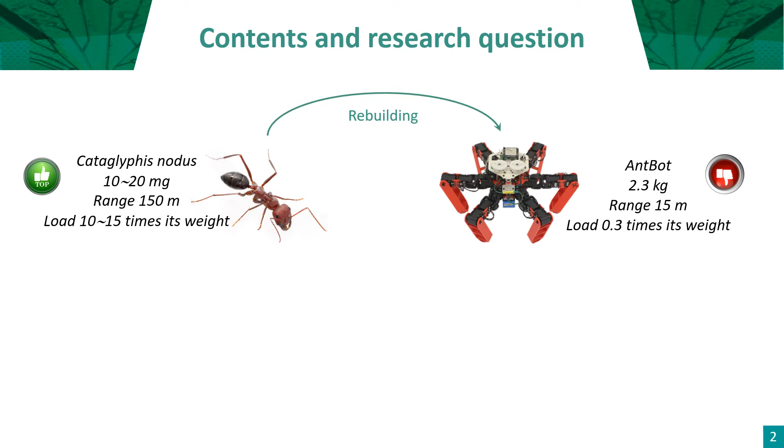The MiMiC-ANT project was helpful to better understand the gap between ants and hexapod robots, to bridge the knowledge between ants and robots. The CRCA has expertise in both ant morphology and locomotion, and the ISM has expertise in both artificial sensing and robot design.

So our research question is here: how can we take inspiration from ants to improve load transport in hexapod robotics?

Let's start with why ants are a good model for the development of innovative locomotor pattern strategies in hexapod robots. First of all, because of their great biological diversity, there are currently more than 13,000 species of ants in the world. These ants live in very diverse environments, from the canopy to the ground. They move on very varied substrates, which can sometimes present strong roughness and constitute very uneven terrain.

Because of the diversity of the populated environments, ants also often present specific morphological and behavioral adaptations, which are often remarkable. You see two examples here.

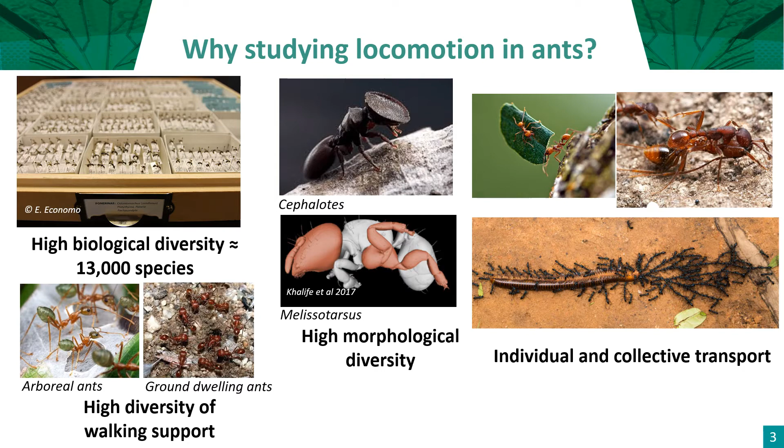Finally, ants have the particularity, quite unique in the animal world, to carry loads either individually or collectively. In some species, the loads carried can weigh up to 15 times the weight of the individual. We can therefore draw interesting lessons for the development of load-carrying hexapod robots from the way these insects adapt their locomotion pattern according to the weight of the load they carry.

Now let's move on to a small recap on the locomotor system of insects, and ants in particular. Like all insects, ants have 3 pairs of legs.

Each leg has a different length and is formed of 5 segments: the coxa, the trochanter, the femur, the tibia, and the tarsus. At the end of each tarsus are usually claws that allow the ant to cling to the substrate. The joints between the different segments are of different types, as can be seen in this illustration.

The sensory feedback on the position of the legs during locomotion is based on the stimuli provided by mechanoreceptors that are distributed at different locations on the legs. The campaniform sensilla are, for example, a type of mechanoreceptor located at the coxa and trochanter and are sensitive to stress on the cuticle.

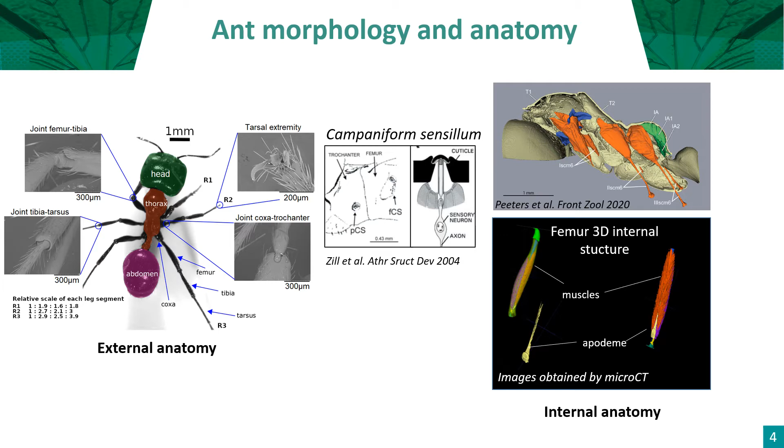The legs are actuated by muscles that are anchored on apodems of the exoskeleton and that can sometimes cross several segments, as here in red, the muscles of the trochanter that cross the coxa and that are anchored on the upper part of the thorax.

To study locomotion in ants, we used the following device. Ants move on a horizontal platform. They are filmed by 5 high-resolution cameras at 250 frames per second. The platform is illuminated by 4 infrared spots which are synchronized with the cameras, which allow a better contrast between the ants and the background on which they move. The videos are then analyzed by Kinovea software, which allows semi-automatic tracking of several points of interest on the body of the ant, in particular the ends of the legs.

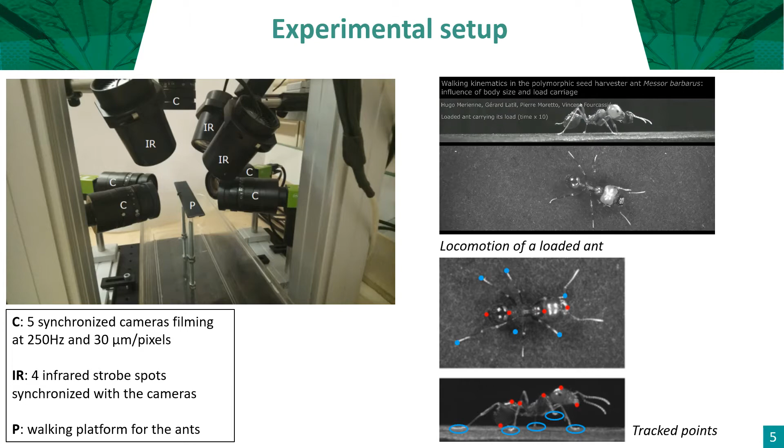The results show that ants are able to adapt their locomotor behavior to the load they carry in order to increase their stability. This stability is indeed put at risk by the load they carry, which shifts their center of mass towards the front.

The 2 graphs you have here are podograms. They show the sequence of support and lifting of the ant's legs as a function of time, for an unloaded ant on the top graph and for the same loaded ant on the bottom graph. The color coding on the bottom of each podogram indicates the number of legs simultaneously in support. The top graph shows that the locomotor pattern observed for an unloaded ant is fairly consistent with the locomotor pattern encountered in all insects. The locomotion is said to be in alternate tripod.

The 2 tripods are formed respectively, for the first one, by the right front and back leg and the middle left leg, and for the second one, by the left front and back leg and the middle right leg. We can see on the podogram of the unloaded ant that the gait is more or less in accordance with this diagram.

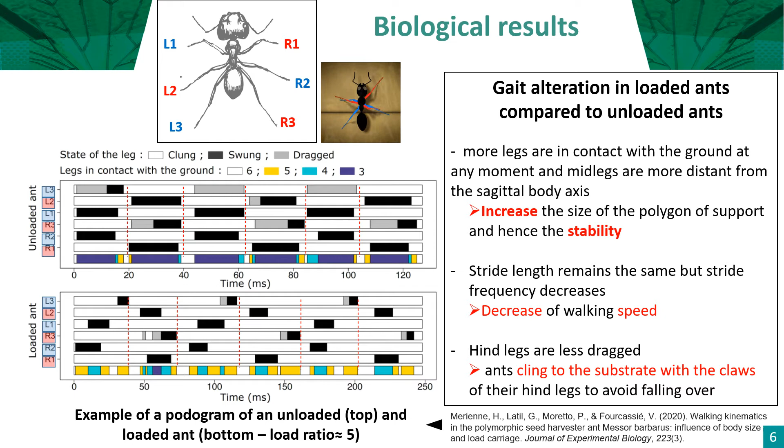In this short video, you can see the AntBot robot working from its starting point. The AntBot robot is fitted with a battery and can work for about 15 minutes. That's why you can see a power supply with a cable to work all day.

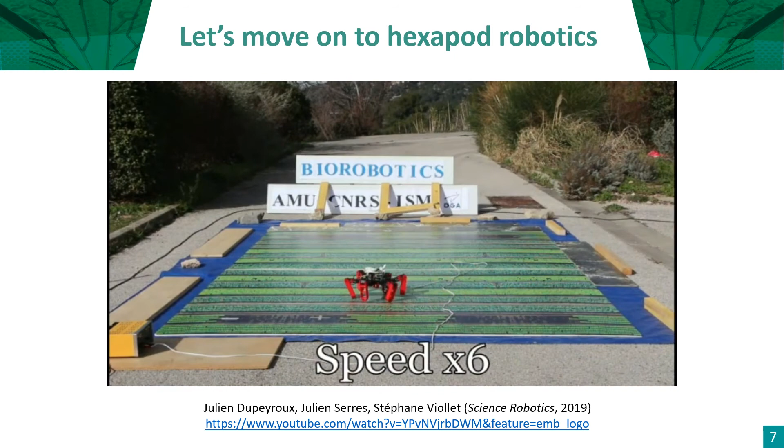The AntBot is motorized with servo motors, consuming a large amount of energy and highly sensitive to outdoor temperatures, with maximal working temperatures up to 70 degrees Celsius. It is quite difficult to make the AntBot generate more than 10 trajectories of 15 meters without having to change one servomotor, because the plastic gears were particularly fragile, mostly during summertime experimentation.

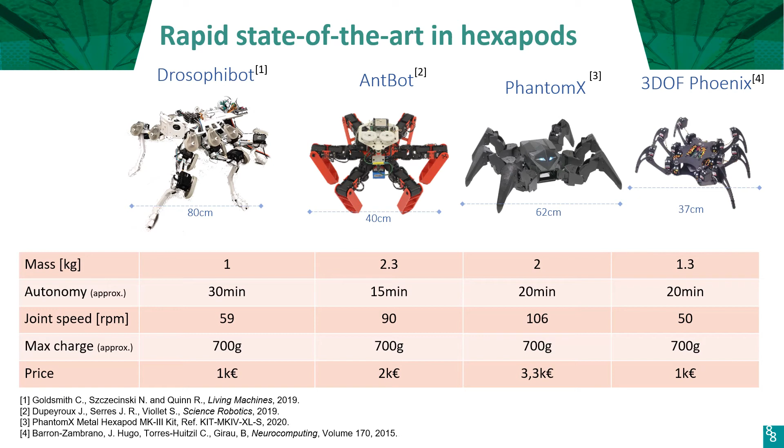Currently, two categories of robots are used to study insect locomotion and navigation behaviors. The first category, like Drosophibot and AntBot, are robots specially constructed in laboratories for a particular task. The second one corresponds to the hexapod robots available on the market, developed for general use and education. For both categories, the mass, autonomy, performance, and price range are the same. Some differences correspond to the structural accuracy and the embedded sensors.

All the previously presented robots are actuated by servomotors, a classical motorization choice for hexapod robots.

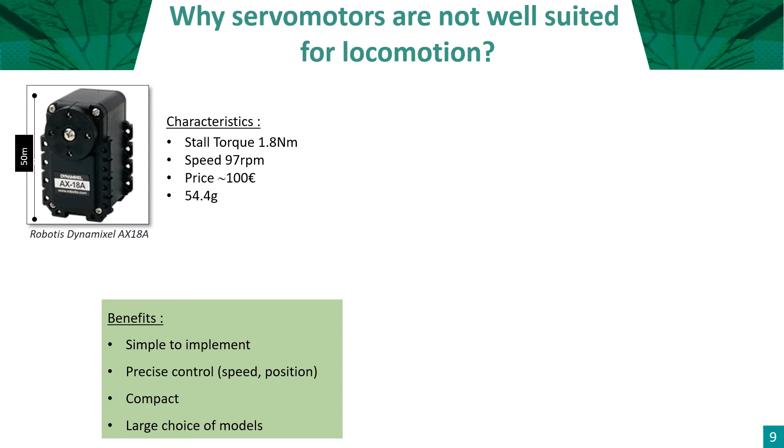Servomotors are simple to implement, easy to control, compact with a large choice of models on the market. Such characteristics explain their wide use in hexapod robotics. However, important drawbacks are also present.

Servomotors have a weak gear system, generally partially composed of plastic gears, and suffer from overheating, which makes it difficult to work in outdoor environments, mostly in summertime.

One of the main drawbacks is also the continuous power consumption, as shown by the figure. An 18 degrees of freedom servo-based hexapod robot in a static position has a continuous power consumption equal to one or two servomotors in movement, which of course limits the autonomy and range of the robot.

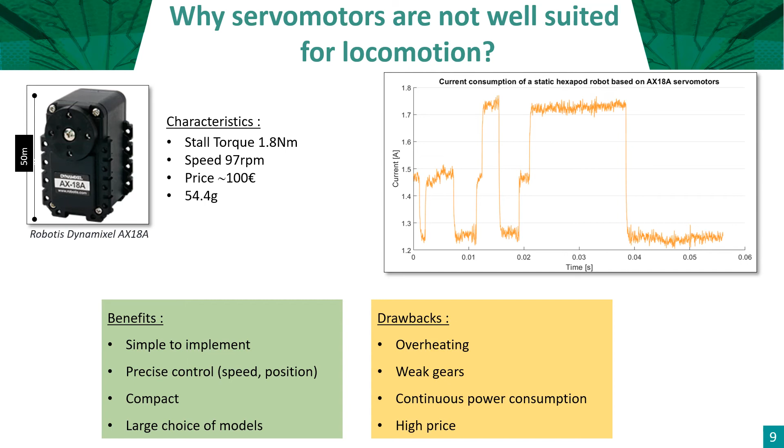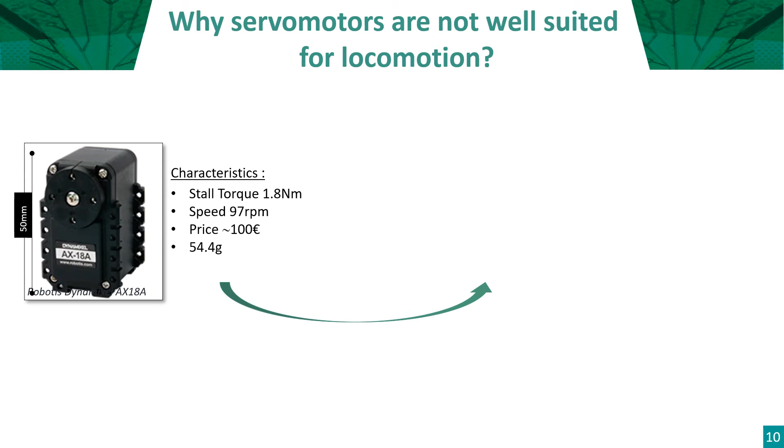To overcome these drawbacks, a new actuator structure was chosen, based on a classical worm gear mechanism. This new actuation structure keeps the same torque-speed ratio as a servomotor, but reduces the cost and improves the durability of the actuator. The key idea of this new mechanical design is to work with a non-reversible joint.

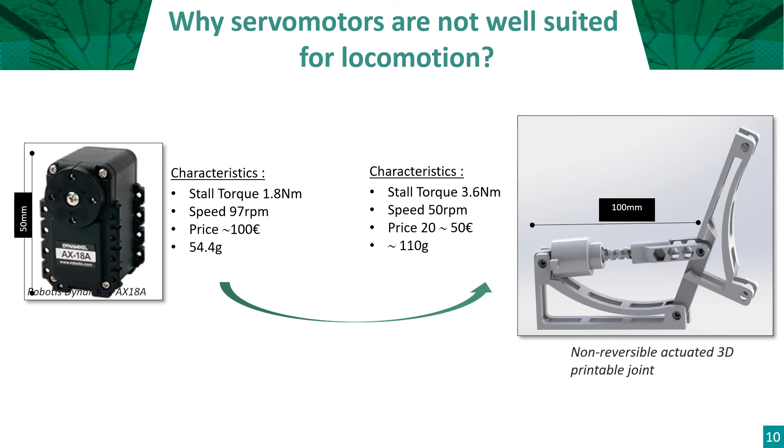This blocks the mechanical structure when the motor is not actuated, setting the power consumption to zero. Based on this irreversible worm gear structure, we constructed a novel hexapod robot's leg.

This leg is composed of 3 degrees of freedom, as often encountered in insect-inspired leg models. The dimensions and angles of the leg segments fit suitably with a Cataglyphis fortis ant leg, with a scaling factor of 30. The leg is fully printed in 3D, which considerably reduces manufacturing price and potentially reparation costs.

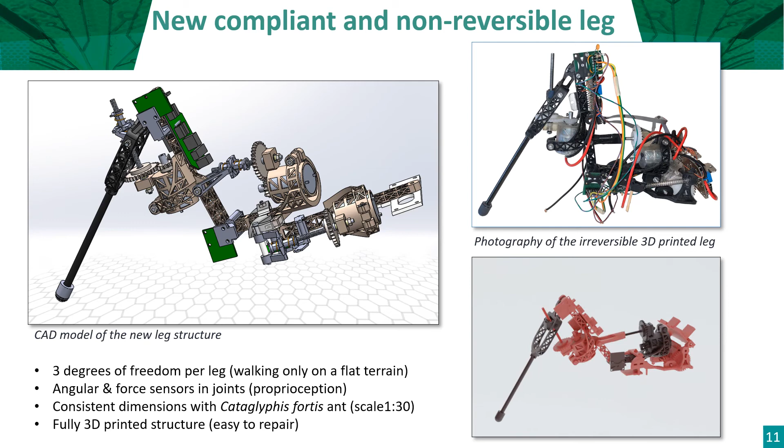To add some compliancy in the leg structure, force sensors were implemented at strategic locations in the joints. The force sensors are composed of a slider and a spring in each joint.

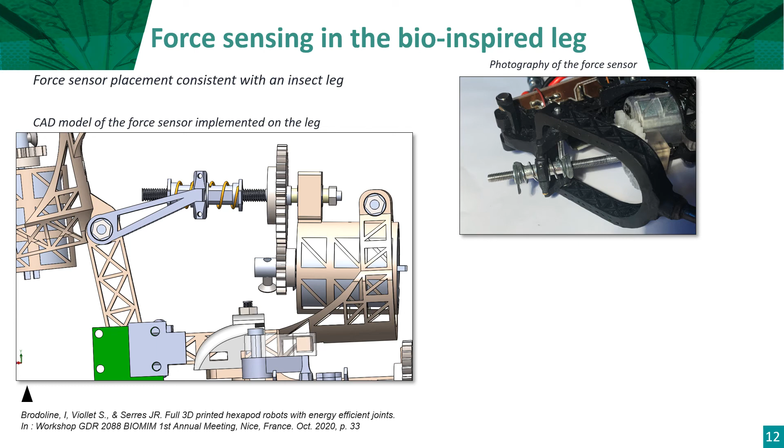Consequently, the force measurement is done at the level of the joints and not at the tip of the legs, as often encountered in hexapod robotics. Such force sensing mimics the campaniform sensilla organs in insects, which are mechanoreceptors taking part in locomotion control.